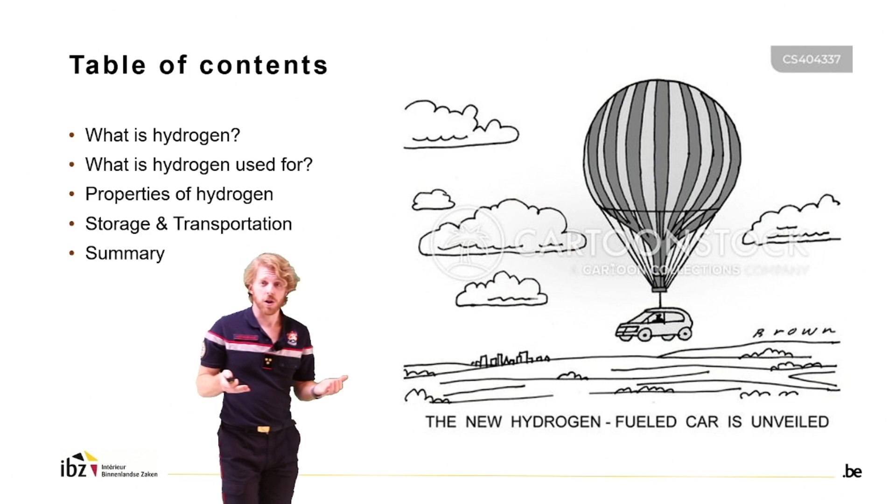In this part we are going to talk about hydrogen, its properties and its risks. First, what is hydrogen? Then what is hydrogen used for, followed by its properties. Then how do we store and transport hydrogen? We'll conclude with a short summary.

So first of all, what is hydrogen? We have this periodic table here, and hydrogen you can find at the upper top left. Hydrogen is an atom, an element, and it is actually the smallest and lightest element currently known. We often mistake hydrogen with hydrogen gas. In common tongue we use the term hydrogen just as we use oxygen, but it's actually a combination of two hydrogen atoms which form the molecule hydrogen gas.

Hydrogen is a flammable gas, and if you combine it with oxygen, you get water and energy, in the form of heat or energy that can be used as electricity. Vice versa, if you want to create hydrogen, we need to apply energy to water to create hydrogen gas and oxygen gas. How does this look like?

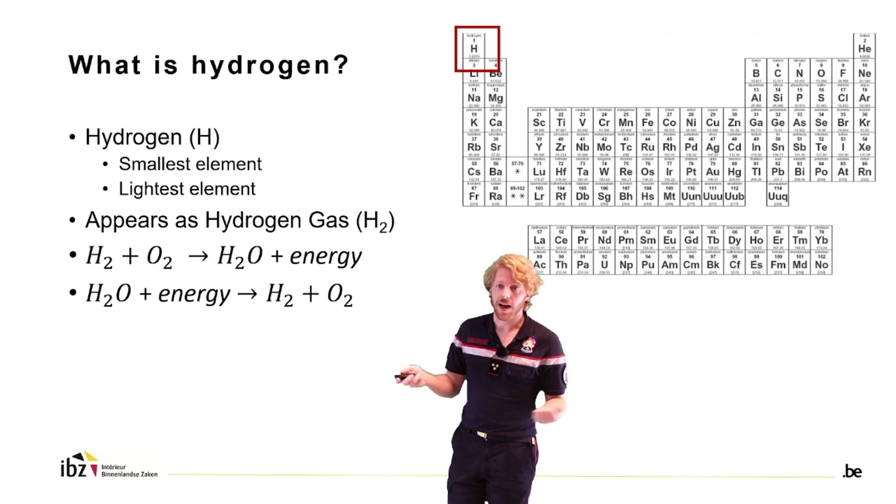Well, it's more like this: you have the hydrogen atoms bonded as a molecule, they combine with oxygen, and then you get water and the energy that is dissipated.

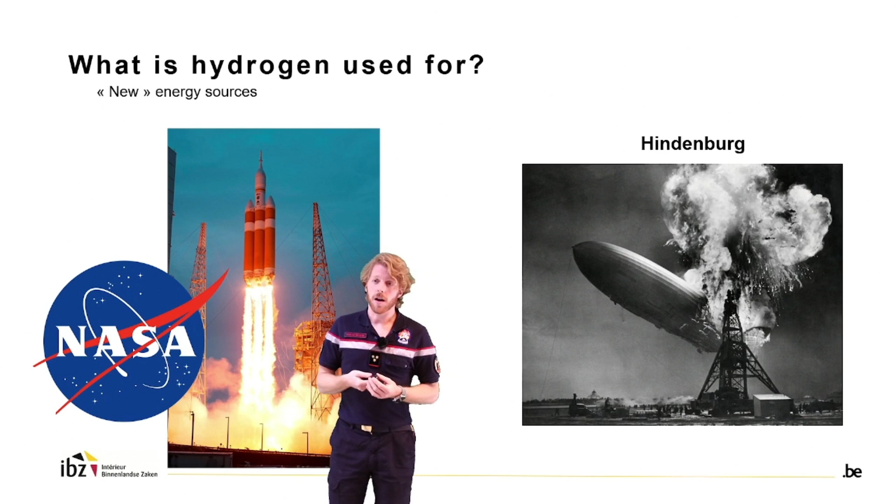What is hydrogen exactly used for? We often talk about new energy sources, but actually hydrogen has been around for a couple of decades already. It has been used as rocket fuel, and one of the most known incidents about hydrogen fires is the Hindenburg, a Zeppelin fueled by hydrogen that exploded, or rather inflamed, due to electricity in the air.

Why do we want to use this hydrogen in current technology? Well, hydrogen has a high specific energy, meaning it contains a lot of energy per unit of mass. If we compare it with diesel, diesel has about 44 megajoules per kilogram, while hydrogen has about 3 times as much energy within 1 kilogram.

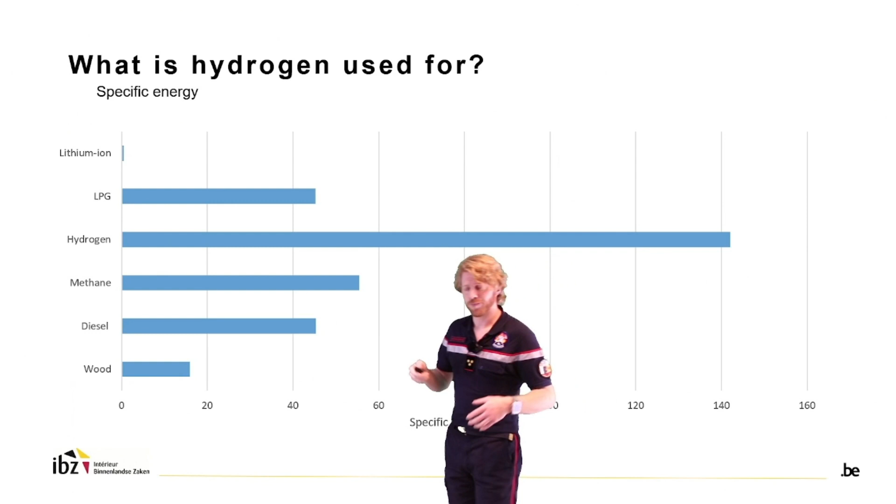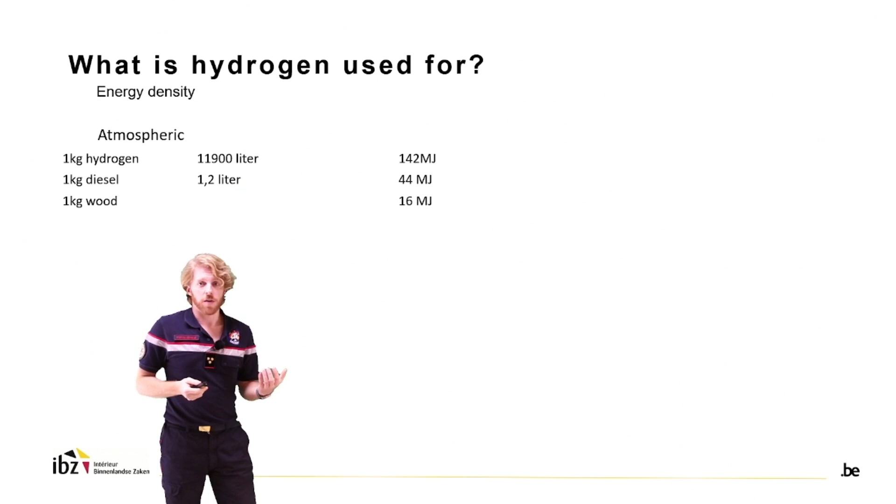This is per kilogram, but we can also look at this by volume. 1 kilogram of hydrogen is about 12,000 liters in volume under atmospheric pressure, compared with 1 kilogram of diesel at about 1.2 liters. So 1 kilogram of hydrogen gives 140 megajoules, whereas 1 kilogram of diesel only gives 44 megajoules. You could say that for 1 kilogram of hydrogen you would need 3 to 3.2 kilograms of diesel.

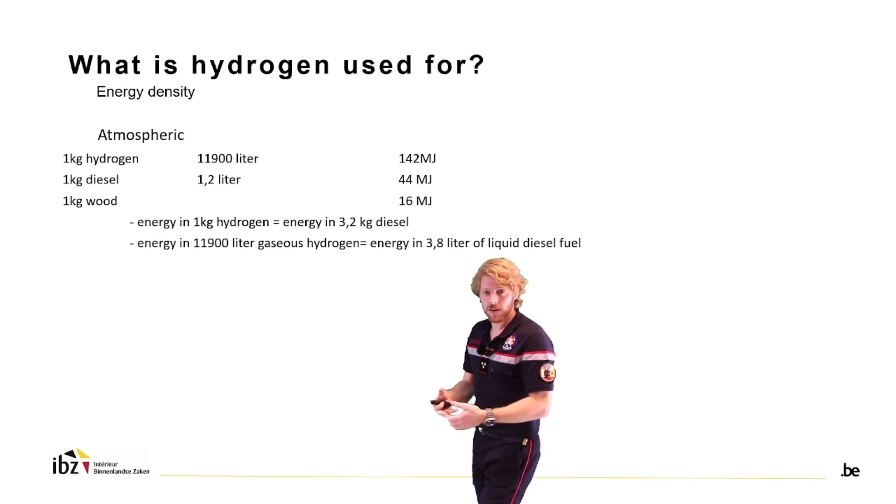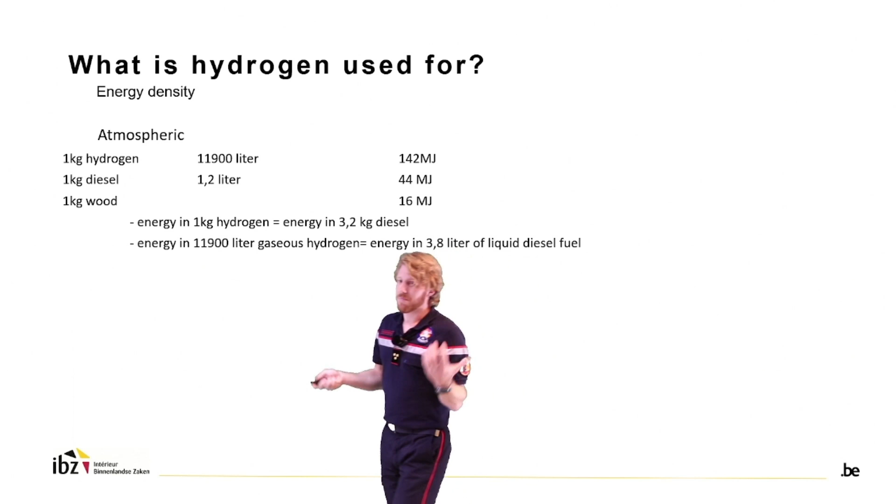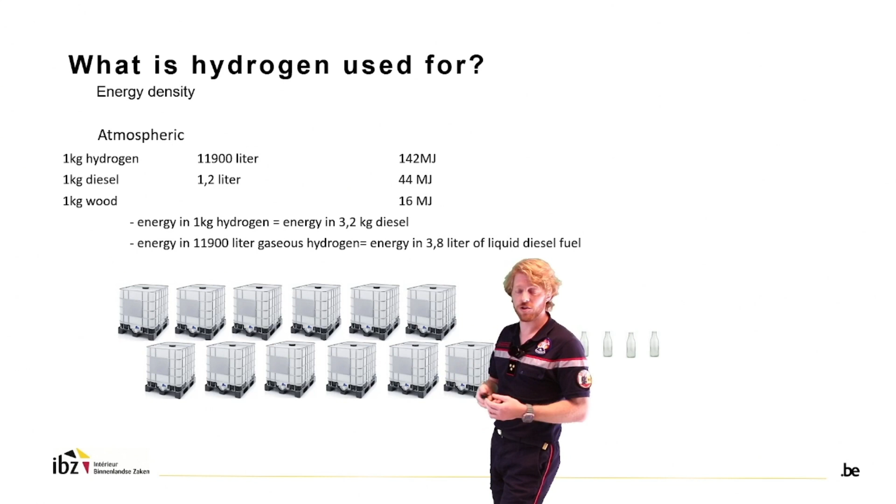However, if you do the calculation in liters, for every 12,000 liters of hydrogen you would need about the equivalent of 4 liters of diesel. This may seem abstract, but compare it this way: the diesel could be contained in small milk bottles, you'd only need 4, whereas for hydrogen you would need about 12 cubic meters to reach the same amount of energy under atmospheric pressure. So hydrogen has a very low energy density per unit of volume, but a high specific energy per kilogram.

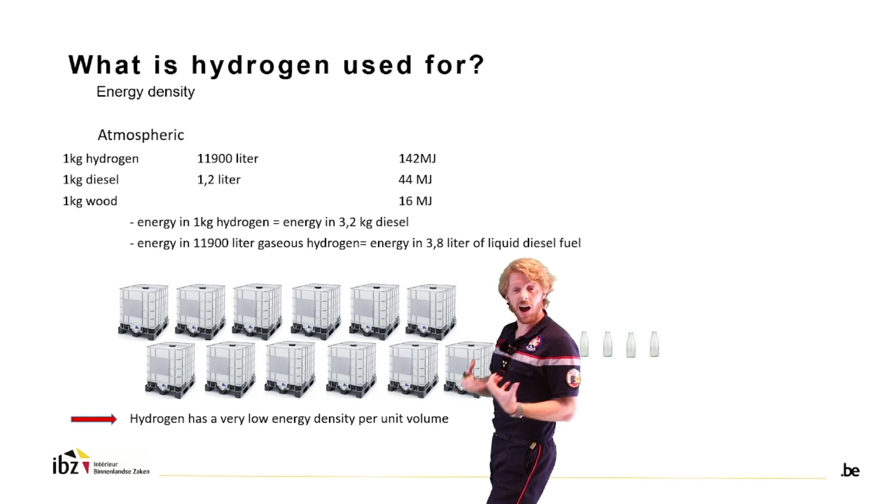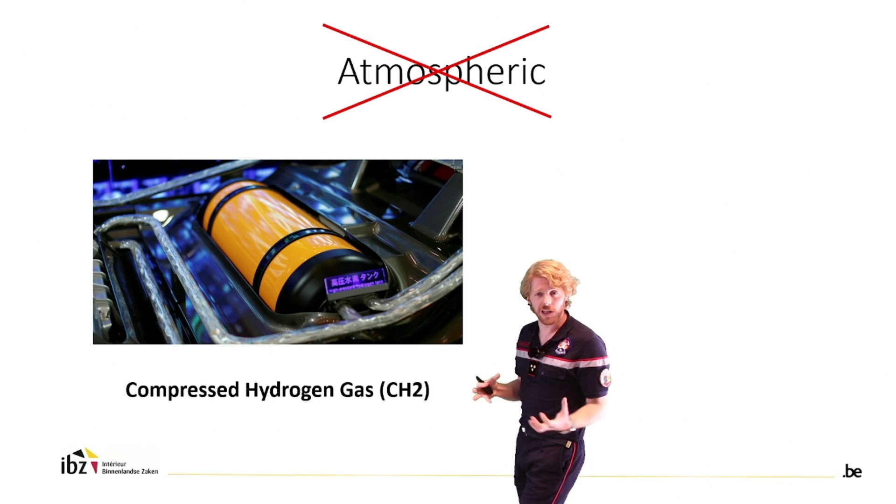This is actually the reason why it is not used in atmospheric conditions. So how does technology solve that problem? There are a couple of ways. The most known ones are to compress it into a cylinder, giving compressed hydrogen gas, or to cool it. If you cool gases they shrink and you can contain them in smaller volumes, so you can also have liquid hydrogen.

If you liquefy it, if you take away the temperature or take away the heat, then you can liquefy that hydrogen and make it in a smaller volume.

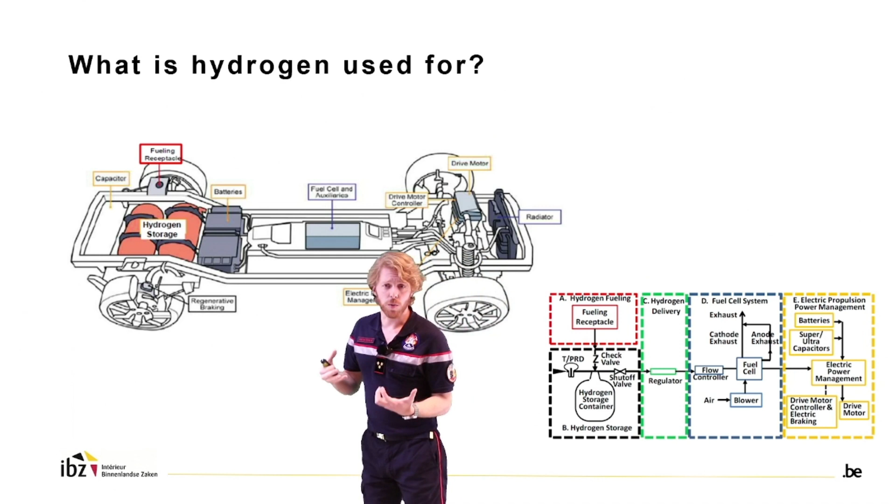What is it used for? Well, most people think about hydrogen-propelled cars, which is actually more or less a sort of electrical car. There's a fuel cell in this car that changes the hydrogen via a chemical process into electricity, and then that electricity goes to a smaller battery, which is used to propel the car.

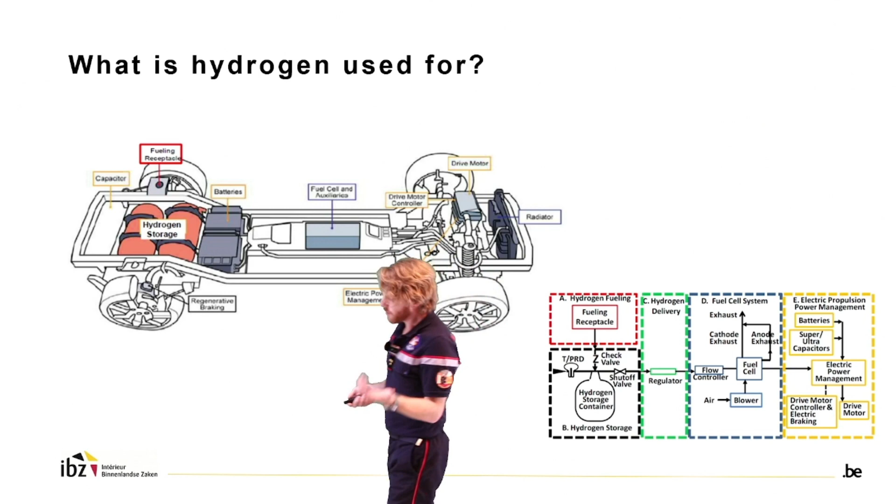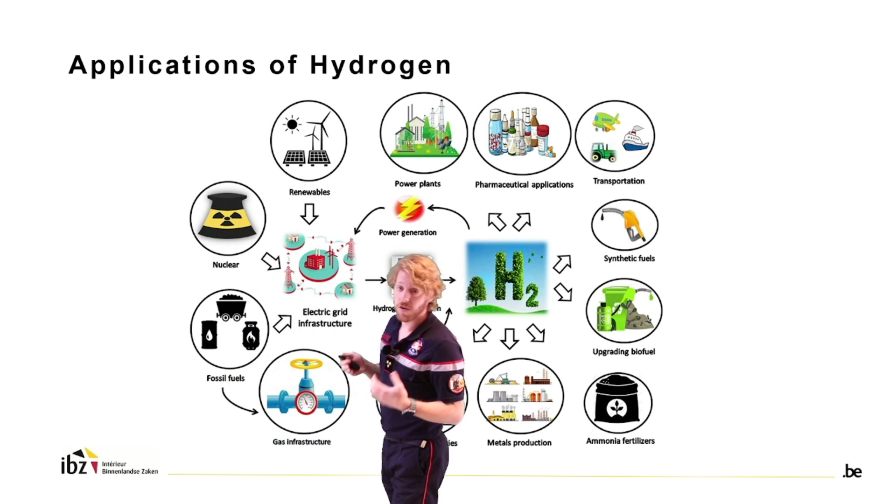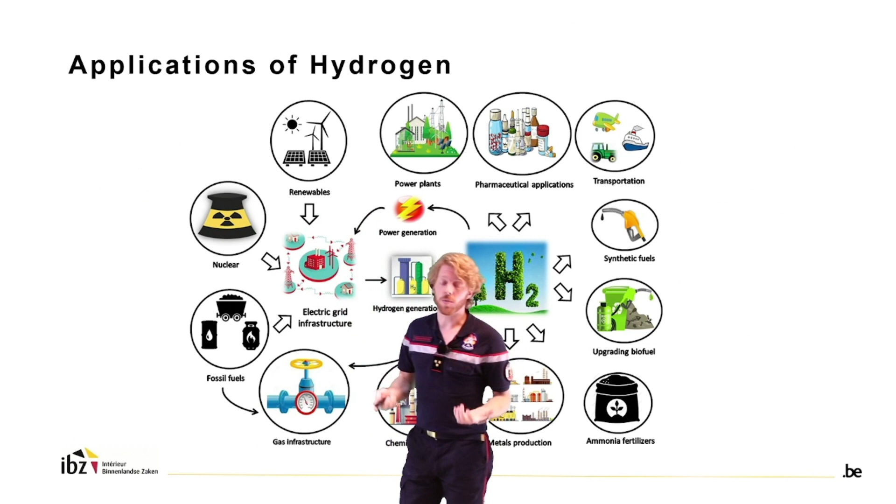But there's actually a lot more applications for hydrogen. You can use it for energy, you can use it to create fertilizers, you can use it to upgrade biofuel, it can be used as a transportation way, but there's also several ways of creating hydrogen. You can create it by nuclear energy, you can create it by fossil fuels, or you could create it by renewable energy.

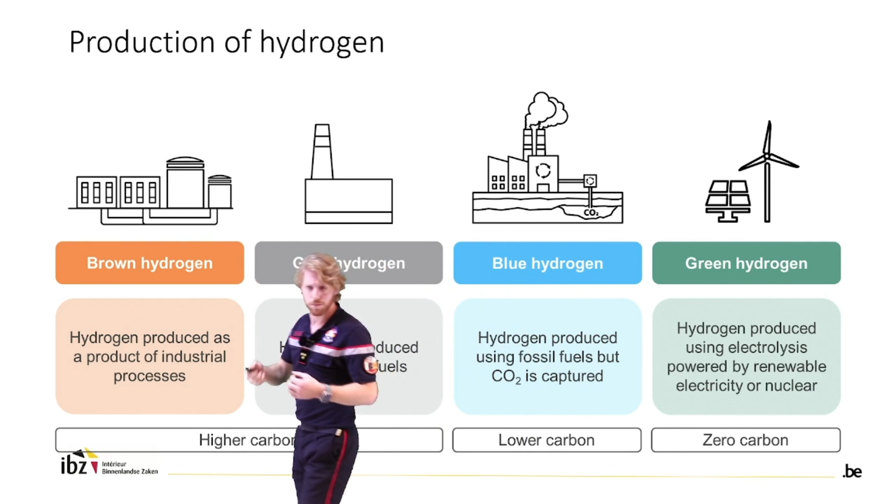This is actually an important thing about the green aspect, because when we think about hydrogen, it's not always this green form of energy. It's not always zero carbon. If it's produced by a fossil fuel, then you cannot really call it a green fuel. Sometimes it's also a residue of another process, or you could create hydrogen and then capture the CO2 to use it for something different. So this is how they categorize different kinds of hydrogen to see if it's more carbon neutral or not.

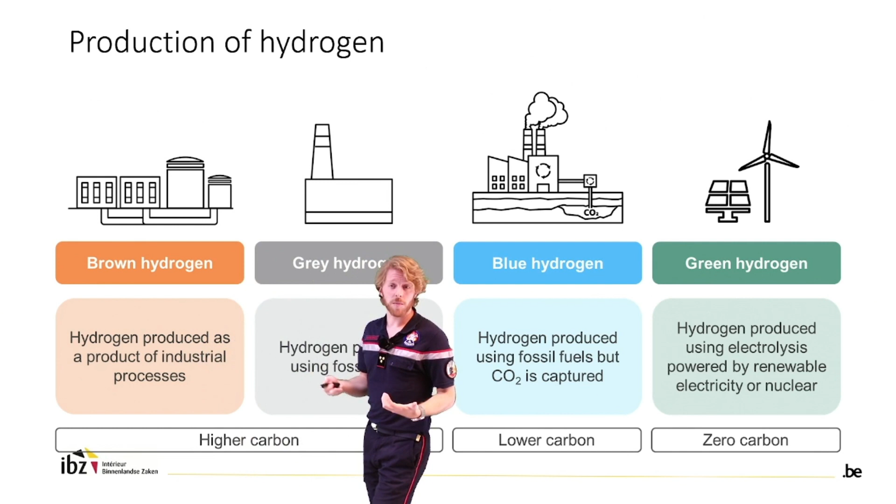Now, for us at the firefighters, what are we going to do with that? Well, first of all, the perception of hydrogen. Hydrogen is a flammable gas. It is colorless, odorless, so we cannot smell it. It's not really poisonous, but it can push away all of the oxygen, so we can suffocate in this environment.

So it's not directly that it would be toxic to our bodies, but if it pushes away all of the oxygen, then we can have some problems to breathe. When we look at some other properties, for example, the buoyancy.

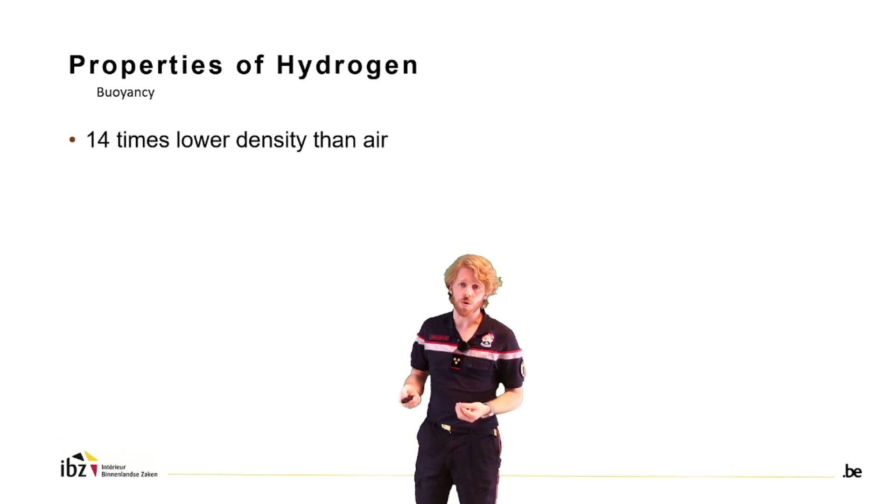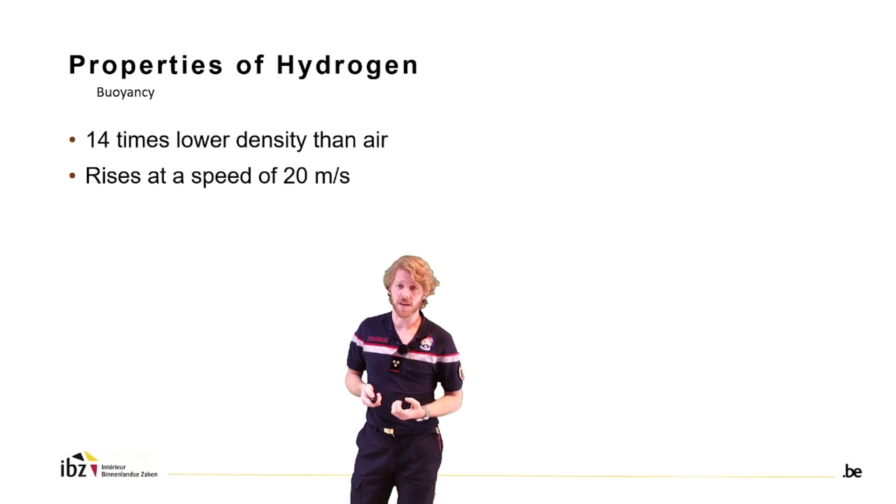Hydrogen, as we said already, is the smallest element that is known. Its density is about 14 times lower than air, which results in it rising at a speed of about 20 meters per second. It's the best buoyancy on Earth, and that means that a lot of the hydrogen is just going to dissipate in the air.

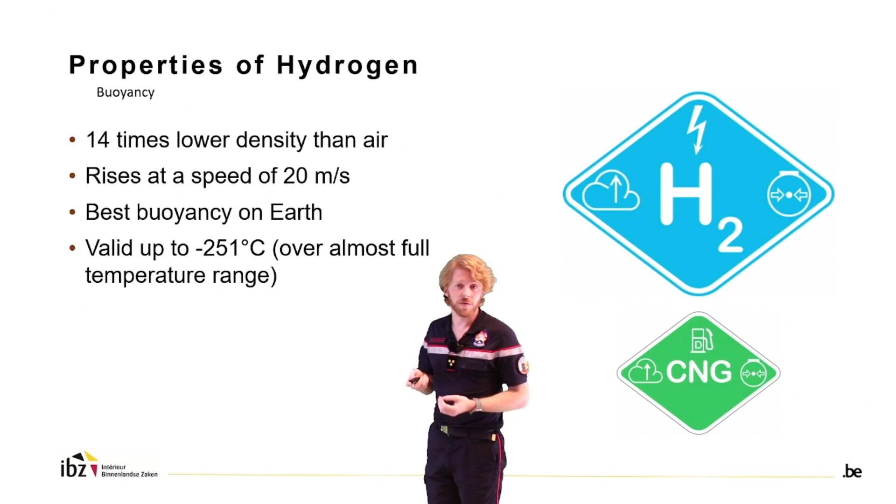So we said already that the density is very low, and that is actually valid up until a temperature of minus 251 centigrade. So if we are outside, most of the undesirable effects of hydrogen are going to dissolve very quickly.

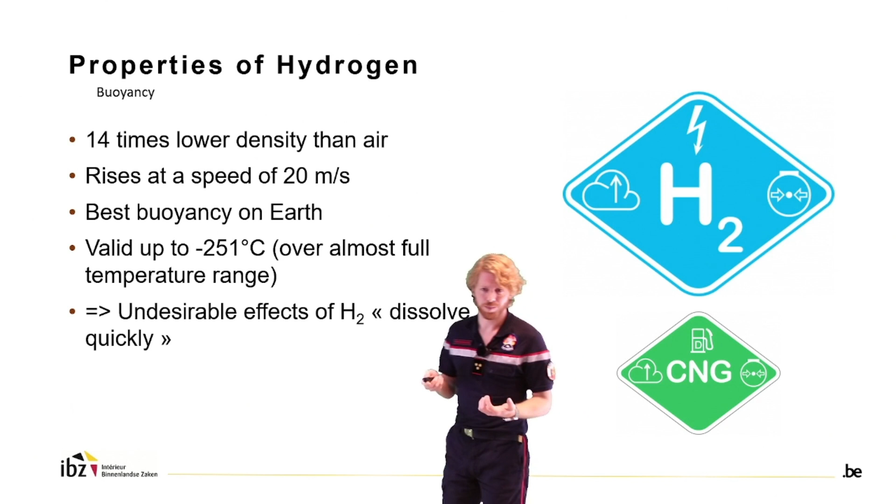We can also look at the flame properties. And for the flame properties, we need to look at this formula that we used in the beginning. So hydrogen and oxygen is a combustion equation, and that creates water and energy.

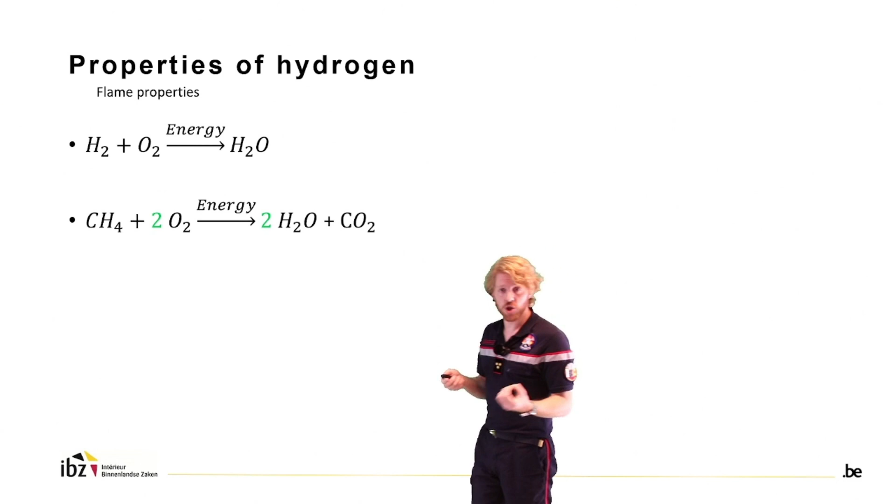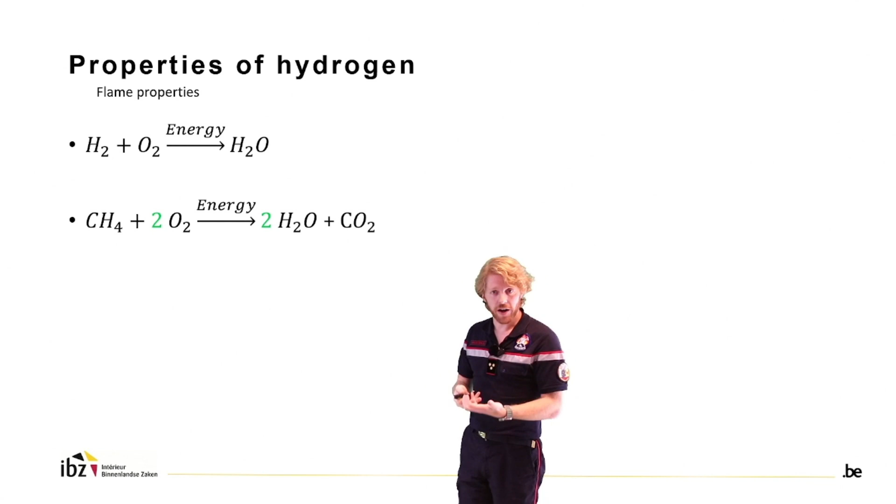To understand that, we need to actually compare that to, for example, the most easy hydrocarbon combustion reaction, which is methane with oxygen, which creates H2O, so water, and carbon dioxide. That's actually if you have a perfect combustion, if all of the methane perfectly gets mixed with air and everything is burned.

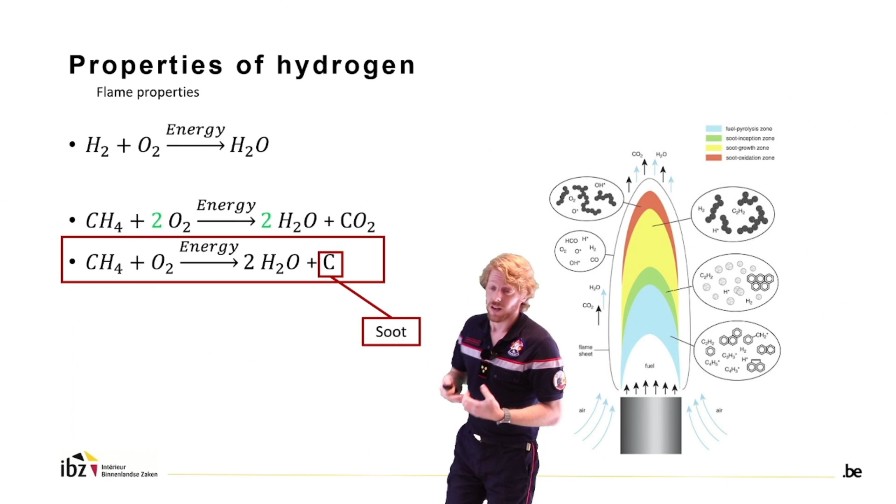If we look at something that is more realistic though, we also have this little element here, carbon or soot. And it's actually due to the soot that flames are visible. Soot can radiate, can become red, become orange, become yellow, and that actually gives the color of a flame. Well, when we look at this hydrogen equation, then we can see that there's no carbon present. That actually means that flames are almost invisible.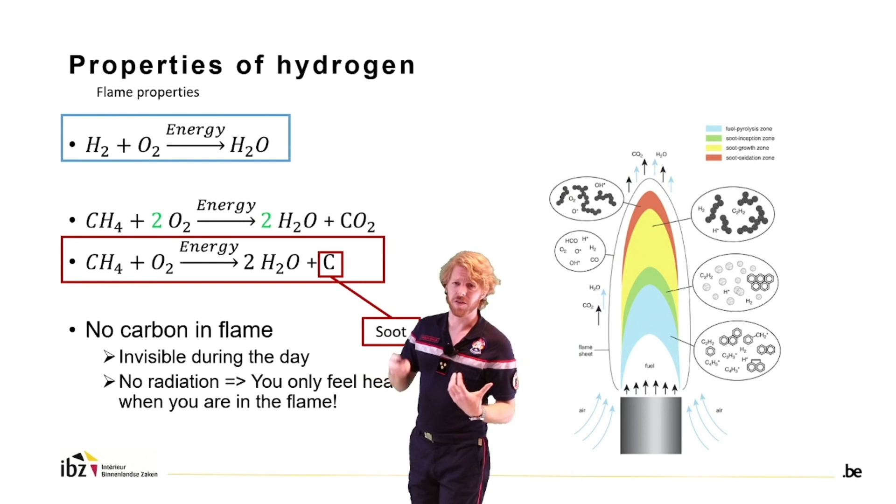But something more important, this soot or this carbon, also due to the fact that it radiates, that is the radiative heat that you can feel when you approach a flame, which is not present in a hydrogen reaction at all. So this is one of the dangerous parts that we have in our hydrogen fires. I'll show a quick video about how you can see this difference.

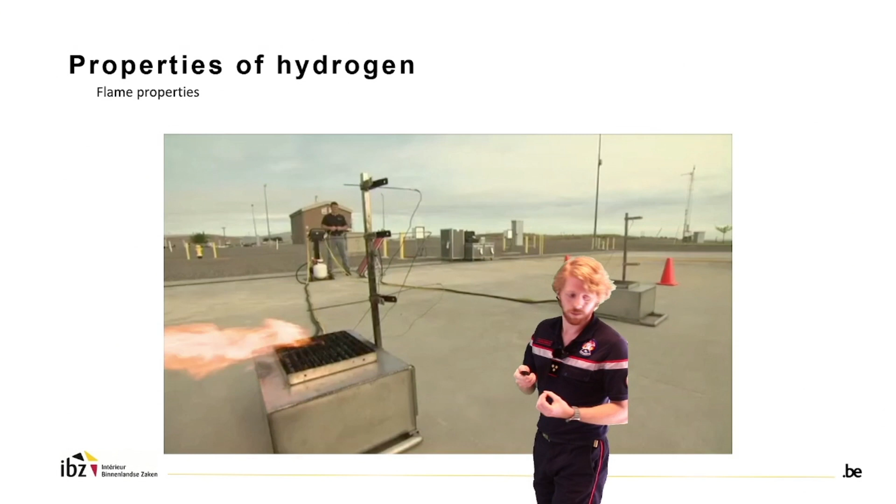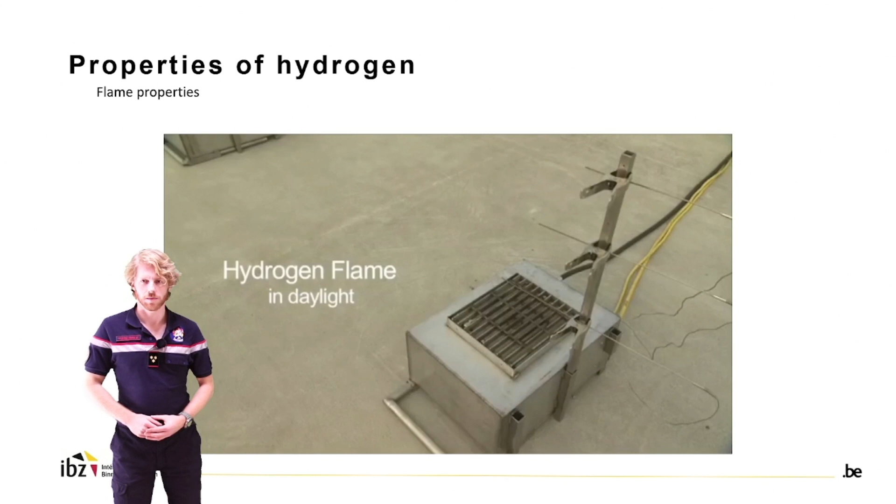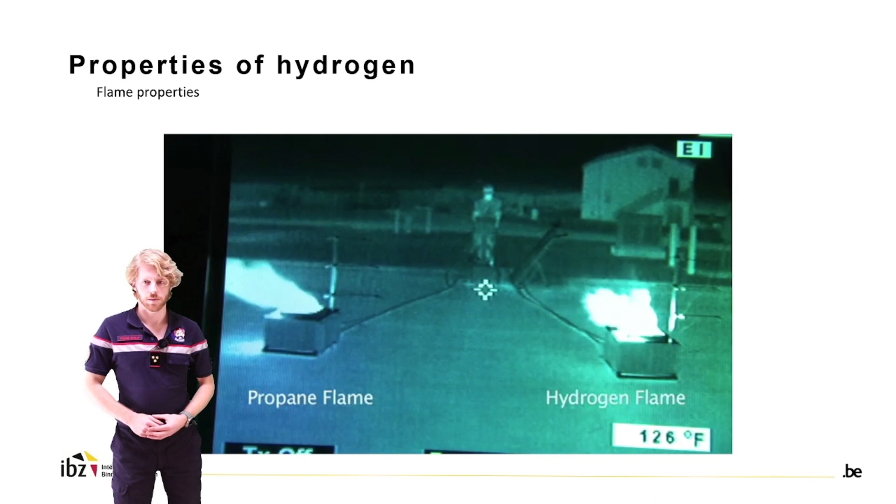Here we have the propane and hydrogen flames burning on a bright sunny day. The orange propane flame is clearly visible, while the hydrogen flame is nearly invisible. But when we look at the flames through a thermal imaging camera, we can see both flames clearly. A pure hydrogen flame has low radiant heat, much less than the heat radiated from burning conventional fuels. Now let's do the same demonstration in the dark, at night.

We are in the same location that we used in the daytime. You can see that the same landmarks are visible. In the dark, both flames are clearly visible without a thermal imaging camera.

So this video gives a small indication of how the visibility of a hydrogen flame really is. It's important to notice that you cannot see the hydrogen flame, but if something around the hydrogen flame is burning, then that is obviously another material that is burning, and that you might see.

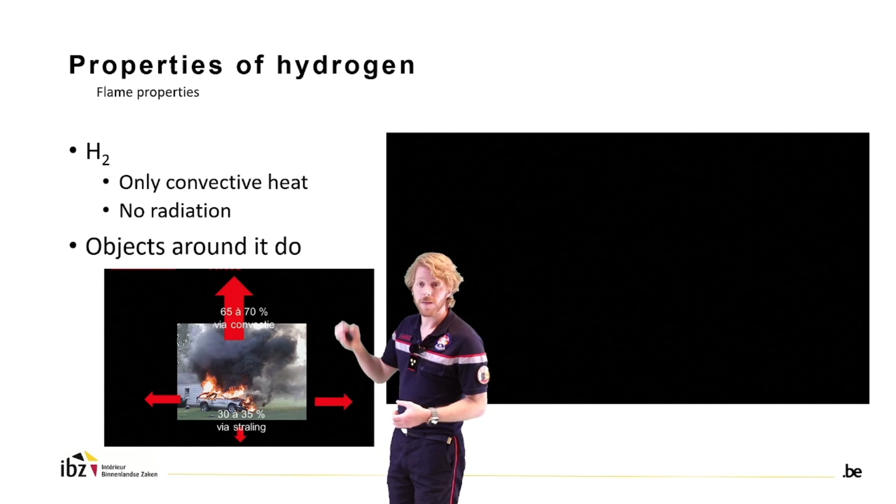We can also check this difference in radiation. As we said before, in a normal hydrocarbon fire, about 65 to 70% of the energy is lost by convection, and the other 30 to 35% is lost by radiation. It's this radiation that we actually feel. Hydrogen fires only have convective heat and no radiation.

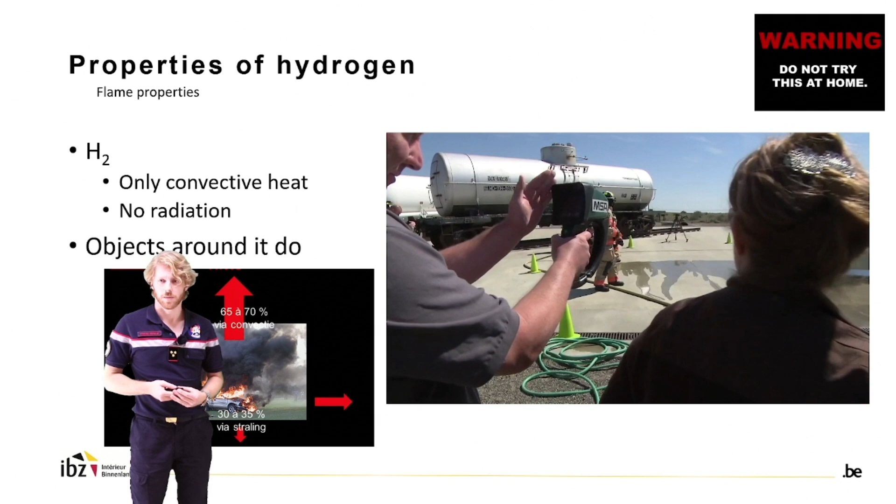Is all my fur intact? How close was that to that flame?

There you go. So small disclaimer, do not try this at home. If you go too fast, then you will have 100% of the heat going through your hands.

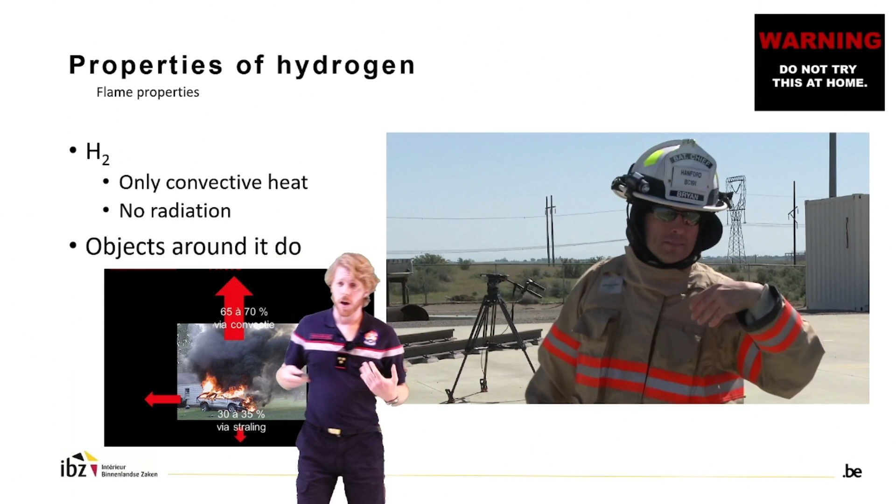Another way to test this is to approach it with a flammable material. As we said before, the flames can become visible if an object around it is burning. So here you see this broomstick. As soon as it goes into the hydrogen flame, the broomstick ignites as well.

When we look at the ignition properties, hydrogen is also a particularly interesting element to talk about, because the flammability limits are actually from 4 to 75%. That is a very large envelope for flammability limits. If we compare that to methane, which is between 5 and 15%, that is actually a much larger flammable envelope.

The detonation limits are a little bit smaller, so what's the difference between flammability and detonation? As soon as you have a detonation, you also have a pressure wave that follows it. The auto-ignition temperature, the temperature where hydrogen ignites by itself, is 510 degrees centigrade. But the flash point, the temperature at which a gas ignites if you apply an external source, is already at minus 253 degrees centigrade.

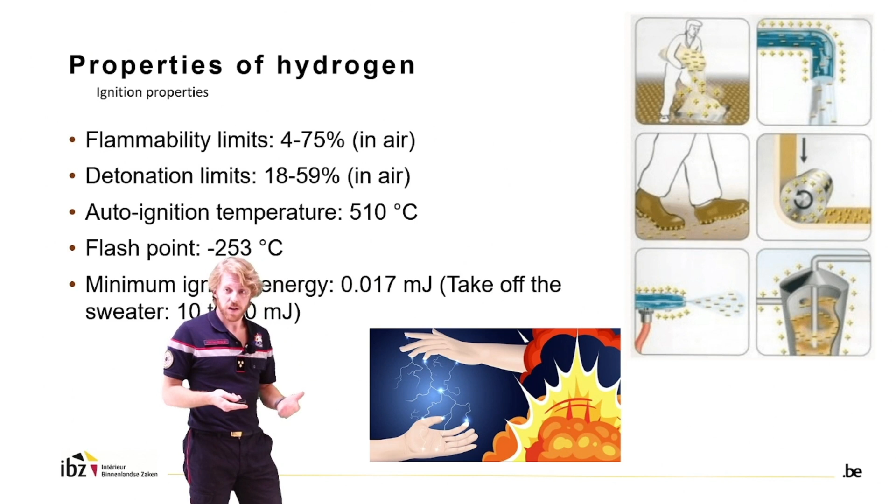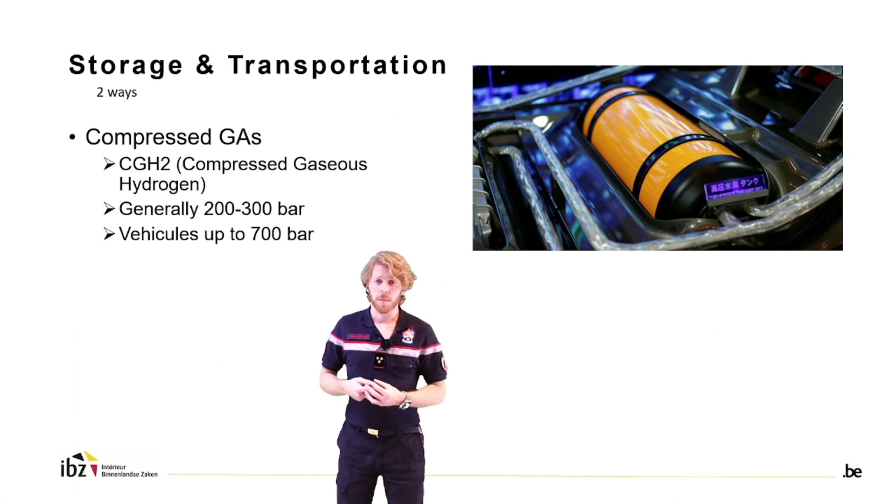Storage and transportation - we already talked about this. There are generally two ways of transportation that are commonly used right now. The first is compressed gas, where you compress the hydrogen so you have a lot more of this mass into one certain volume. Generally, the pressures are between 200 and 300 bars, but vehicles can even go up to 700 bars.

If we compare that, the second way is to really cool it down so the hydrogen liquefies. And that happens at minus 253 degrees centigrade.

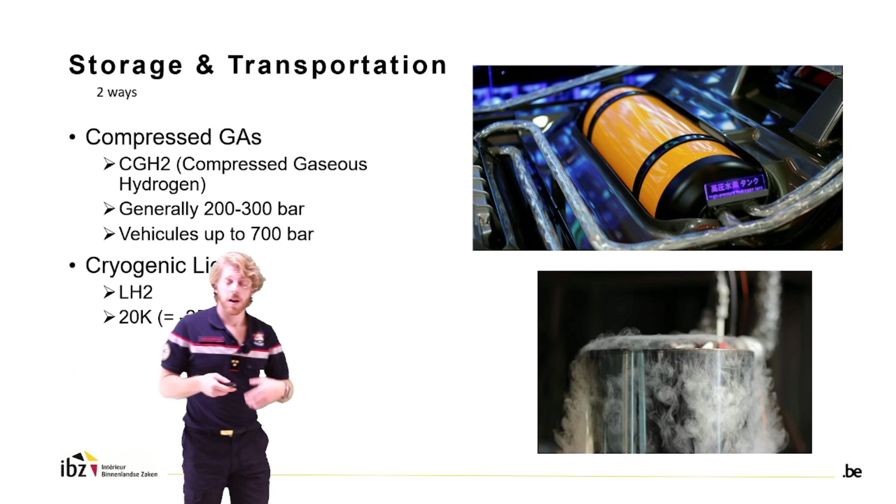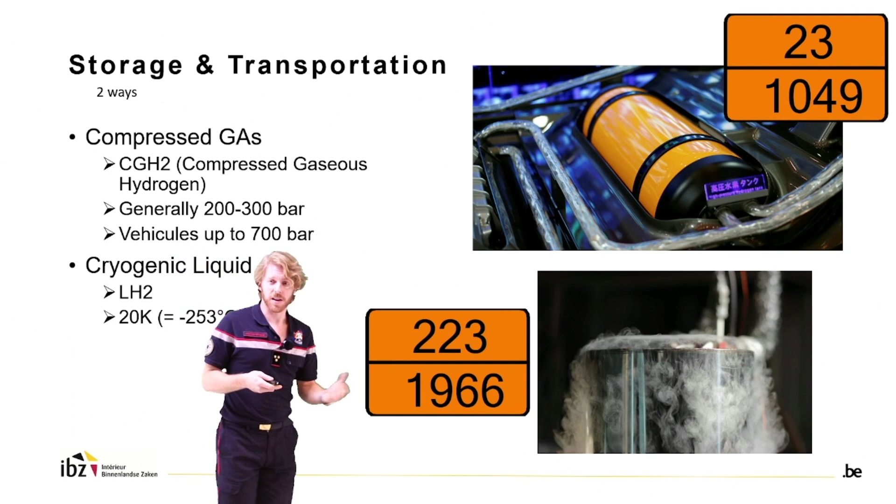Operationally, you can actually recognize those as well. In Europe, we have the ADR conventions. So when we look at the compressed gas, it's marked 23, which indicates a flammable gas. If we look at 223, then we have a very cold gas that is flammable and can ignite. So let's first look at the compressed hydrogen gas.

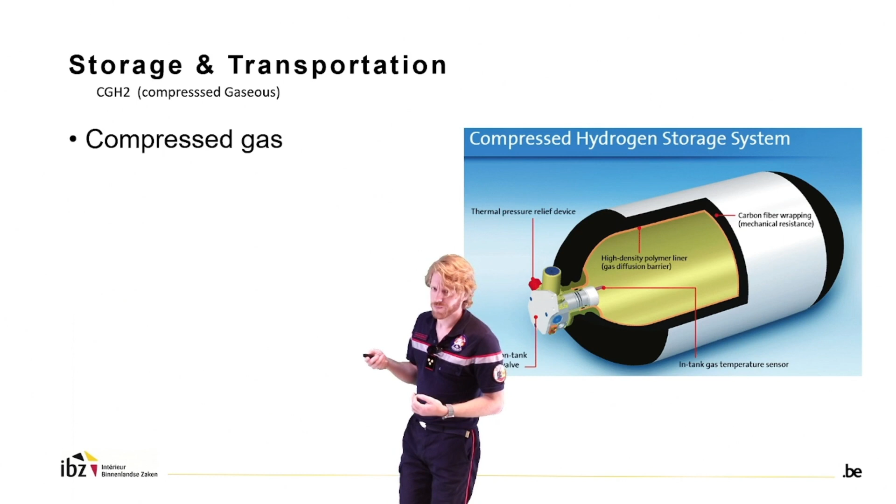If one of these pressure vessels is heated, then the pressure can arise again. Heated gases increase in pressure, but the problem is that these vessels have a certain amount of pressure they can handle before they rupture. So increase the heat too much and you may actually have a physical explosion.

One of the solutions designed by the technological society is a TPRD, or thermal pressure relief device. Another way to deal with this is to use a composite vessel that acts with resins. More about this later - this is a new technology being studied right now.

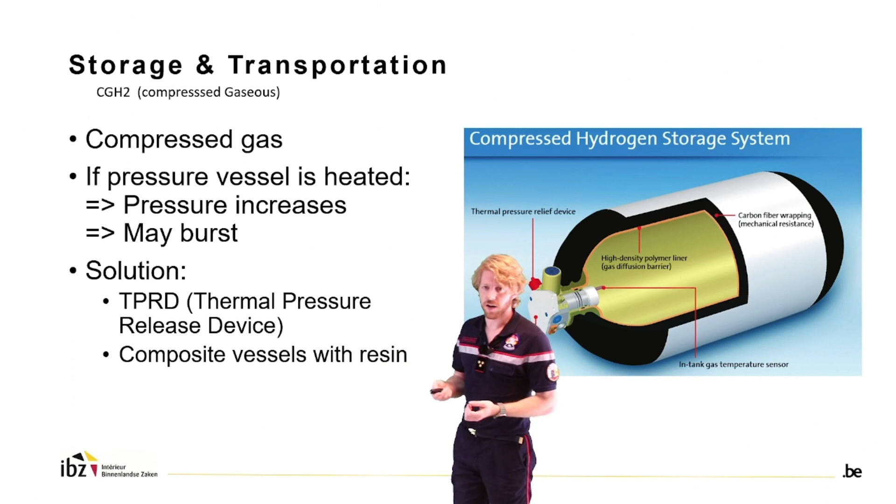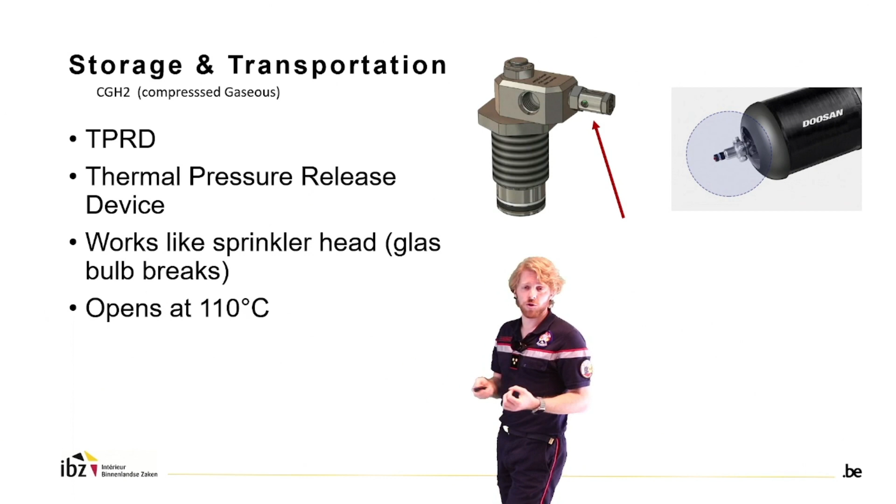First off, a TPRD, thermal pressure release device. The words say it already - it's a thermal device, it releases pressure. So if this device gets too hot, it will actually open up a valve. It works a bit like a sprinkler head, where a glass bulb can break, and as soon as it's broken, it continues to release this gas. It opens at a temperature of about 110 degrees centigrade, and once it is open, it keeps blowing off.

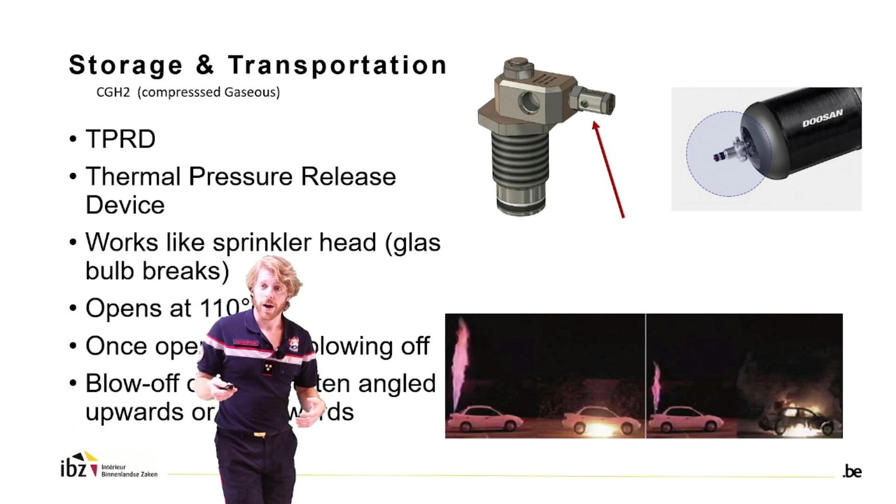It blows off often in an angled way, either upwards or downwards. There's no real convention about this, so you always have to take care and be aware of where you can find this hydrogen jet flame. Always look with your thermal imaging camera to really know where the jet flame is happening.

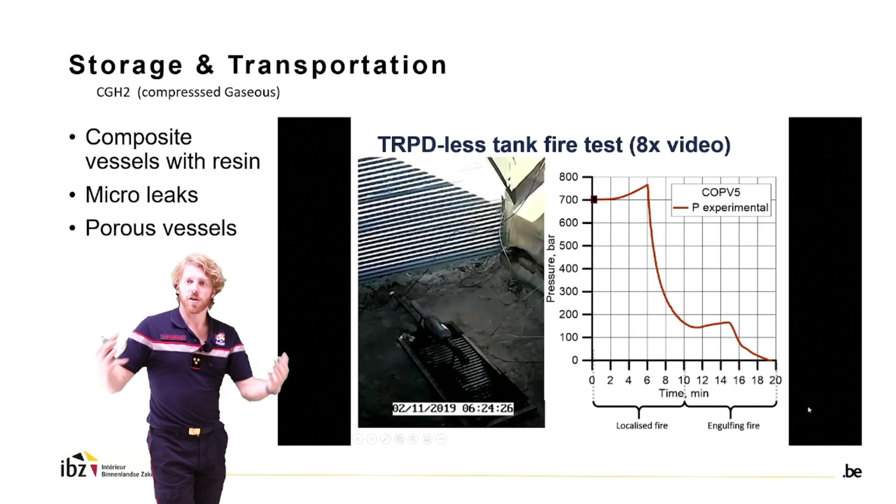A second way of preventing explosions is to use composite vessels with a sort of resin in it. If you engulf this with a flame, the pressure will increase, and this resin, this inner layer, will actually start to melt and create tiny micro leaks. So you create a sort of porous vessel, and the hydrogen can escape as soon as the micro leaks are large enough.

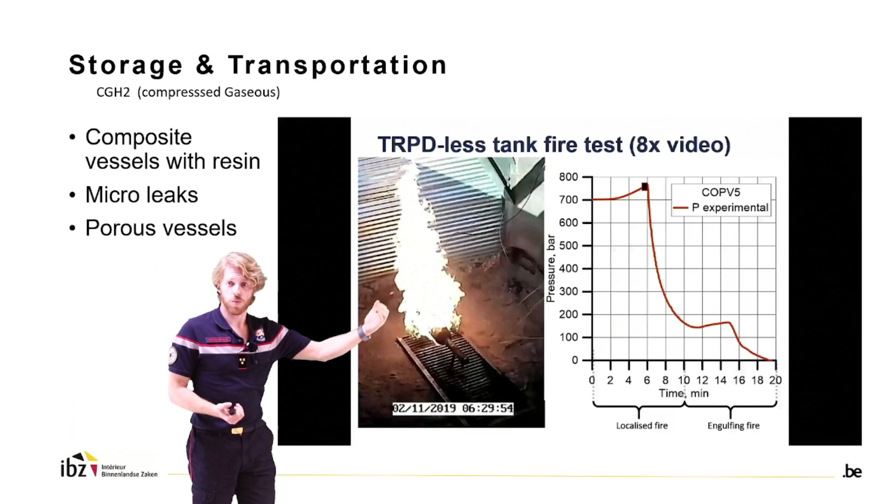Right now you see that the pressure is increasing, and as soon as enough of this resin is melted, you will see that the pressure will slowly release. At this moment the leak starts. So actually you're going to create a higher heat release rate as well, because the hydrogen is leaking from the vessel itself - it will make a larger fire, but at least we will prevent explosions. So the pressure will decrease in this experiment.

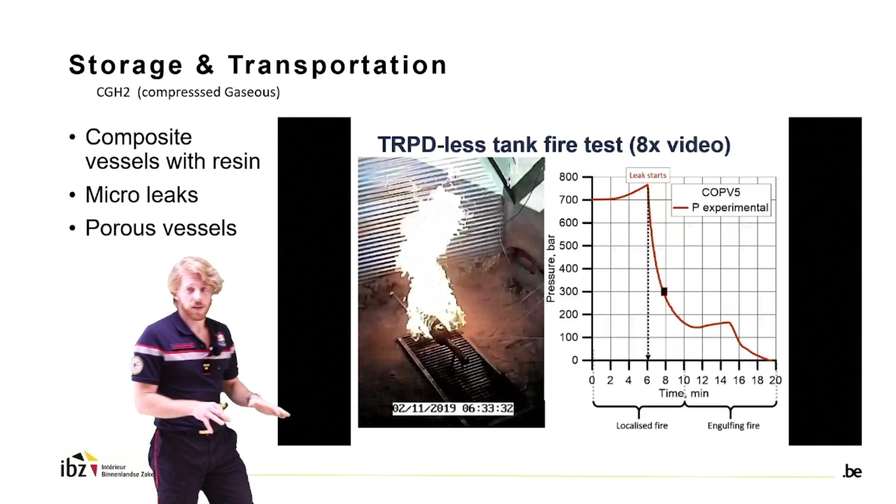Then at 10 minutes, it will be engulfed with a real fire, an additional fire. Imagine this: you have a local fire around the cylinder in your car, and at a certain point the whole car is involved in flames, or the whole filling station, or whatever is burning around it. So you have a higher heat release rate again, and you see that the pressure is rising again. But just as before, as soon as the heat is large enough, you will create bigger micro leaks that will release the gas again in a small and slow way.

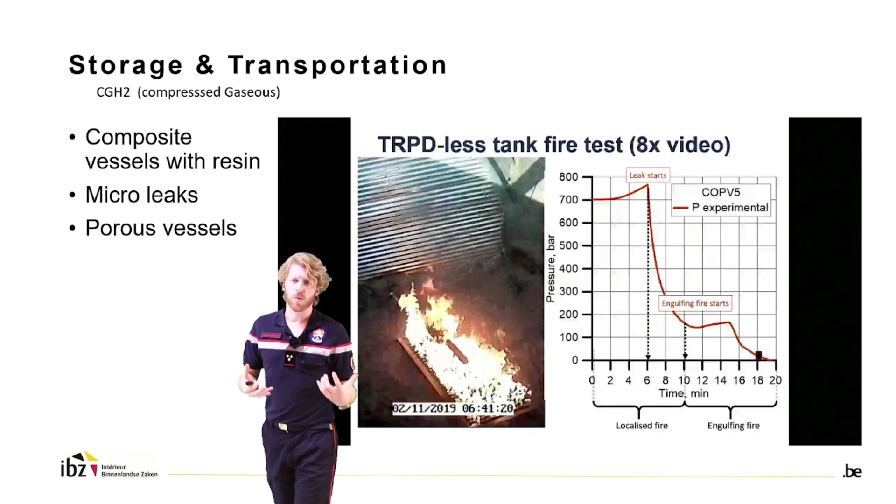It's important to note that this is a fairly new technology, and recently there have actually been explosions of these types of vessels, but more research is needed about this.

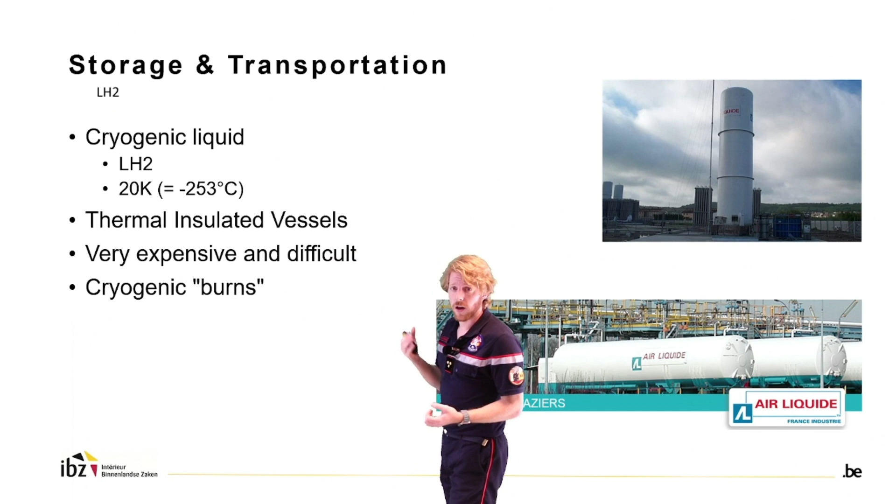We can also transport hydrogen by cooling it down as a cryogenic liquid. Typically you use thermally insulated vessels for that, but this is very expensive and difficult to build. It's also very energy demanding. But operationally, as soon as we encounter one of these vessels, we have to be aware of the additional risk of cryogenic burns. So even if the gas is not burning already, you can actually burn yourself by approaching the cold.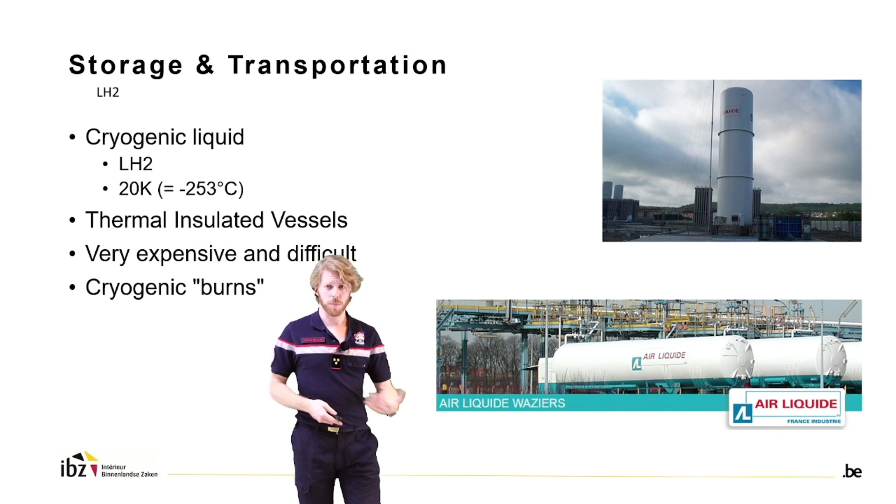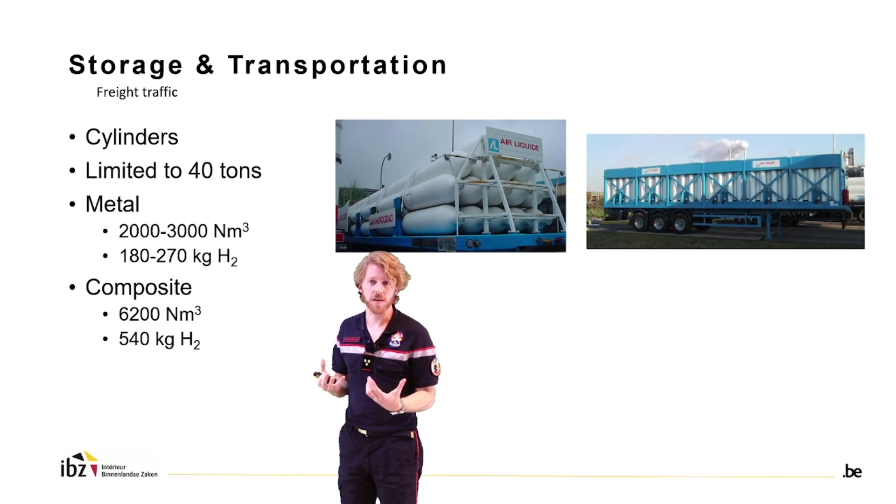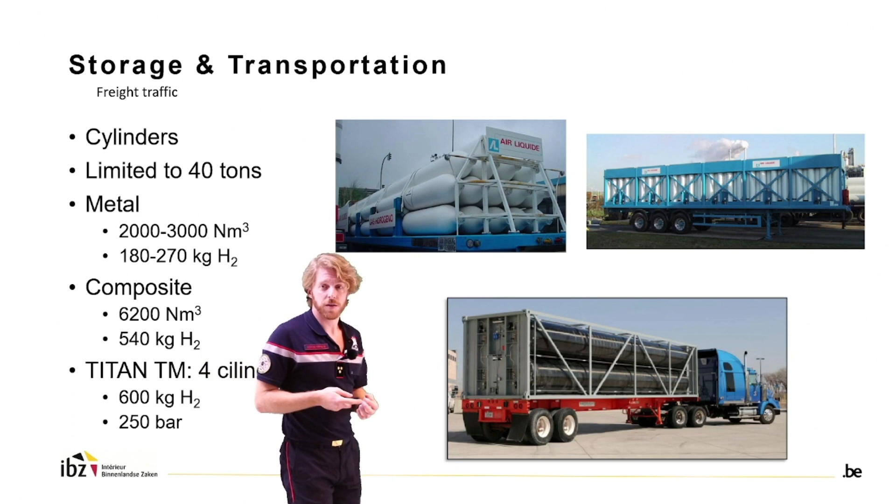For freight traffic with compressed gas, typically this is done by cylinders. In Europe they are limited to 40 tons. You have metal cylinders and composite cylinders. But one important aspect is that generally these cylinders don't have a TPRD. Typically if they're metal, we also need to be aware, because it won't have this resin inner layer, so these bottles can actually explode. In the US there are even larger cylinders that can send up to 600 kilograms of hydrogen per cylinder, so this is an even higher risk.

When we compare that with cryogenic liquids, you typically have tankers between 30,000 and 60,000 liters, which transport about 4,000 kilograms of hydrogen. But as we said before, it's an energy demanding and expensive way to transport this, so it is generally used for longer distances.

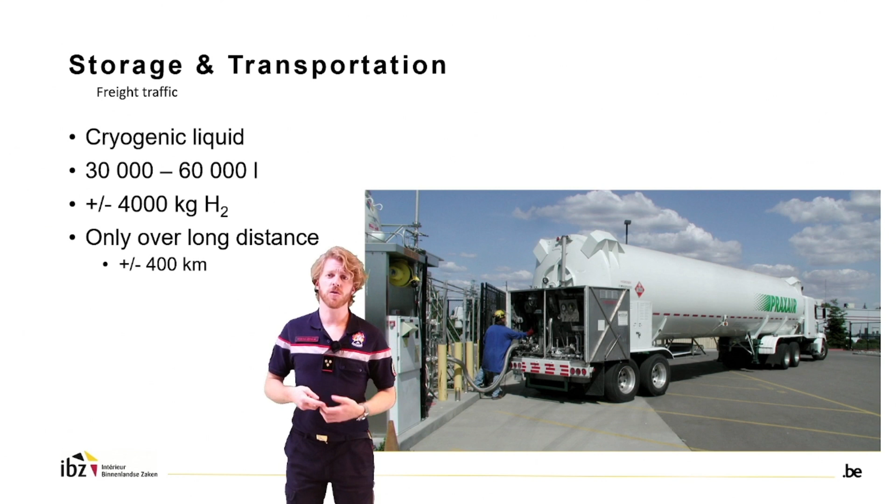Finally, another way of transportation is by the use of pipelines. Europe is actually trying to use its current pipelines to transport hydrogen as well.

In Belgium, we have these action cards or procedures, which we already used for methane gases or other flammable gases, and which we adapted for the use of hydrogen.

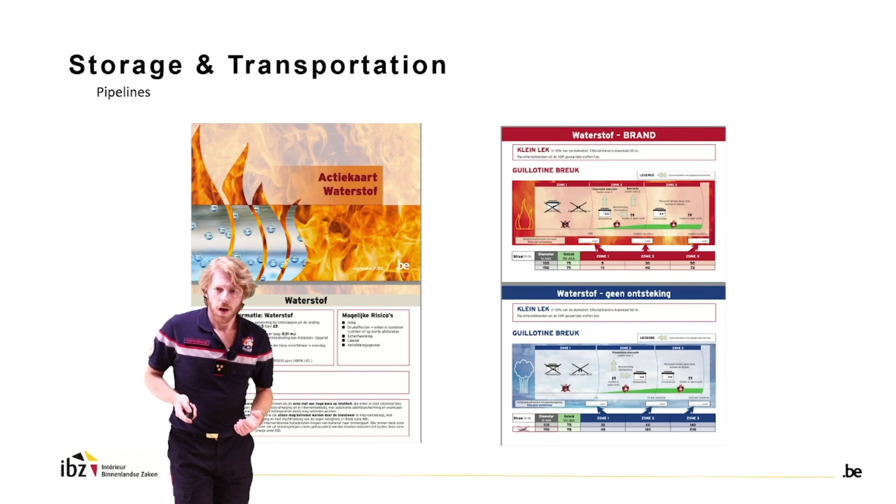I'm aware that not everyone may know these types of cards, and I apologize because it is in Dutch. But generally, we have two different options: either it's a gas that is on fire, or it's an unignited gas that is released.

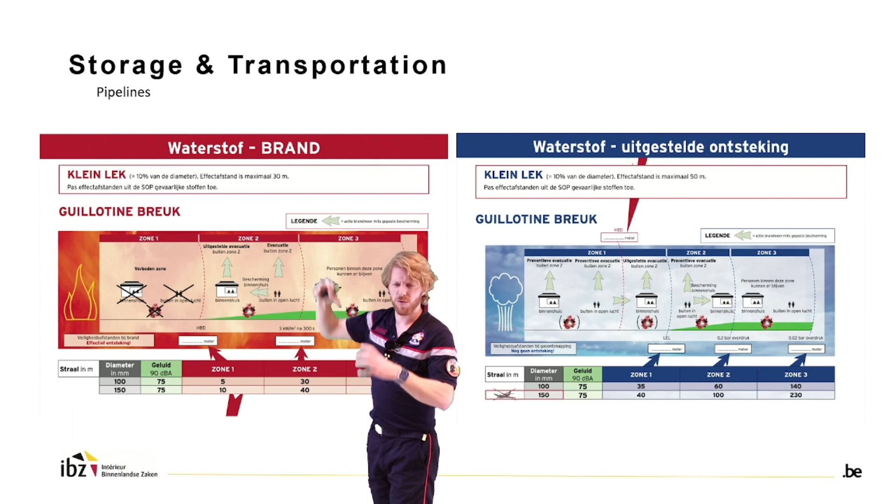We also make the distinction between a small leak, generally 10% of the diameter, and then a large guillotine rupture, where a huge amount of gas or flames are released.

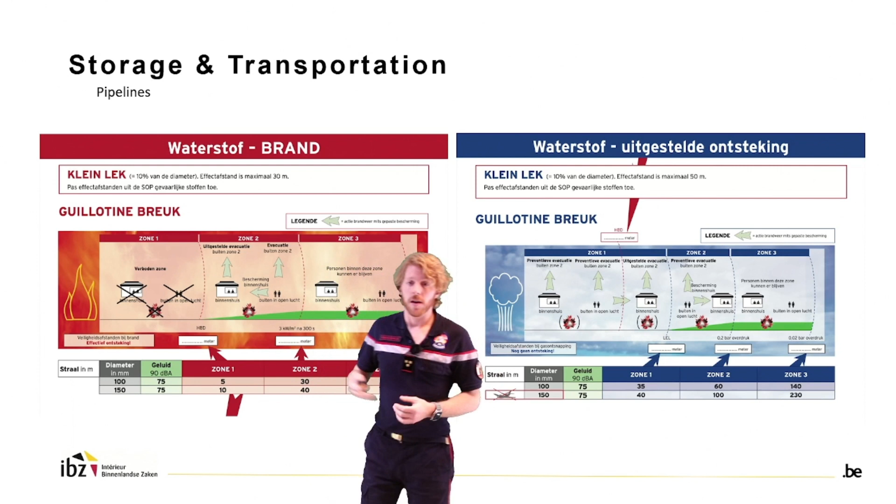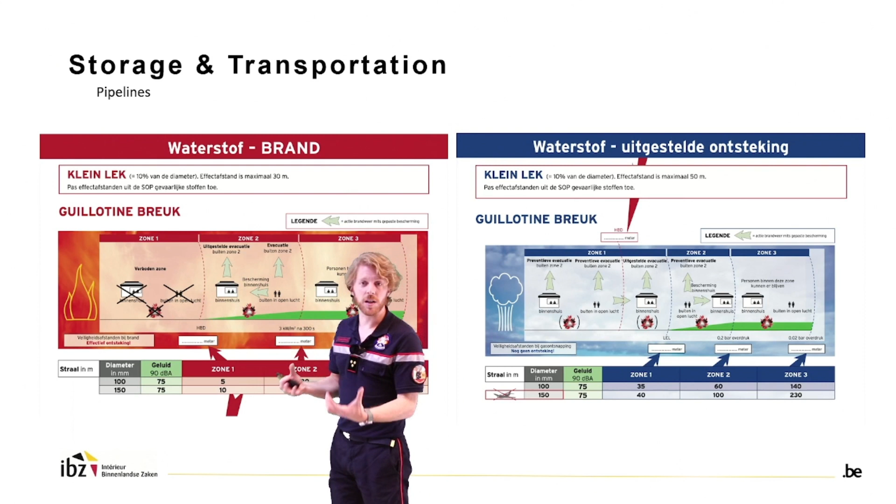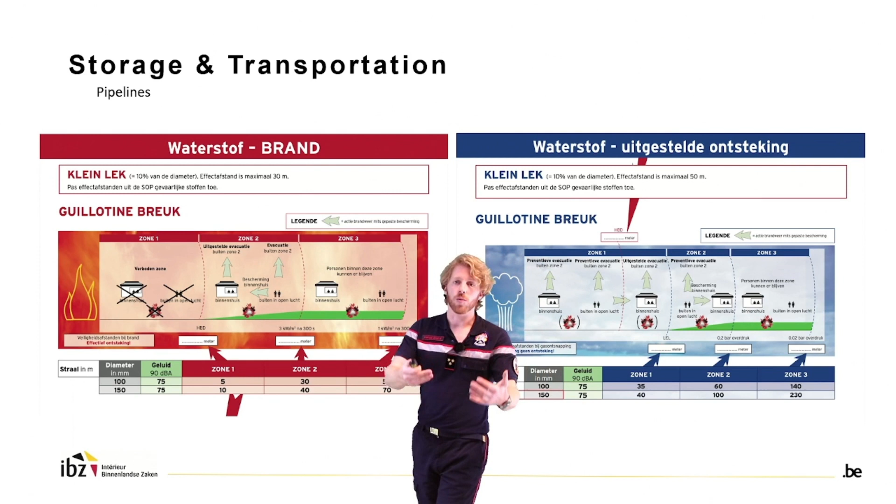Obviously, there are a lot more technologies that involve hydrogen which we have not covered in this webinar. You have train transport, forklifts, filling stations, boats, and in the future there will most likely be more technologies available.

Finally, I want to address you again to the HyResponder website. There you will find a lot of materials, such as all of the information that we are trying to condense here in a couple of minutes, hours.

But there's also this e-laboratory. If you go by the QR code, or just use the website, then you can go to an e-laboratory, which gives you the opportunity to work with all kinds of different properties about the bottles, about the orifices of the gas, the pressure that a cylinder can have, and to show you, for example, the flame length or the jet flame distance, or even explosion distances.

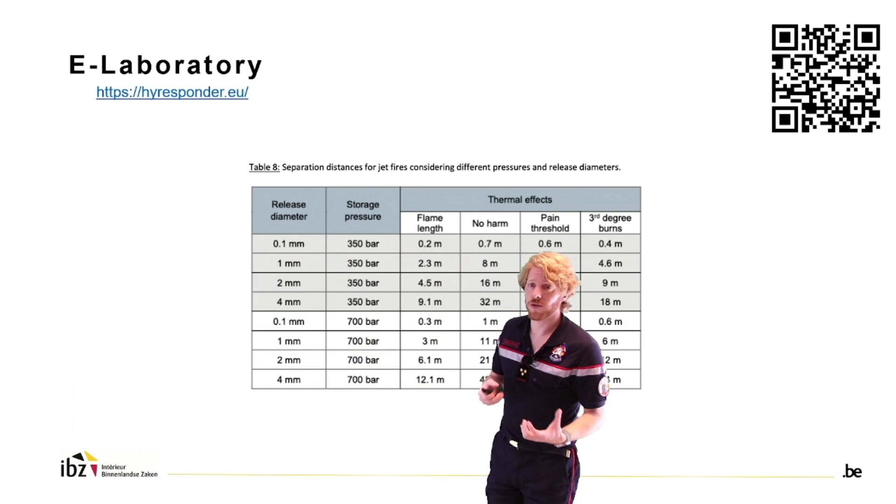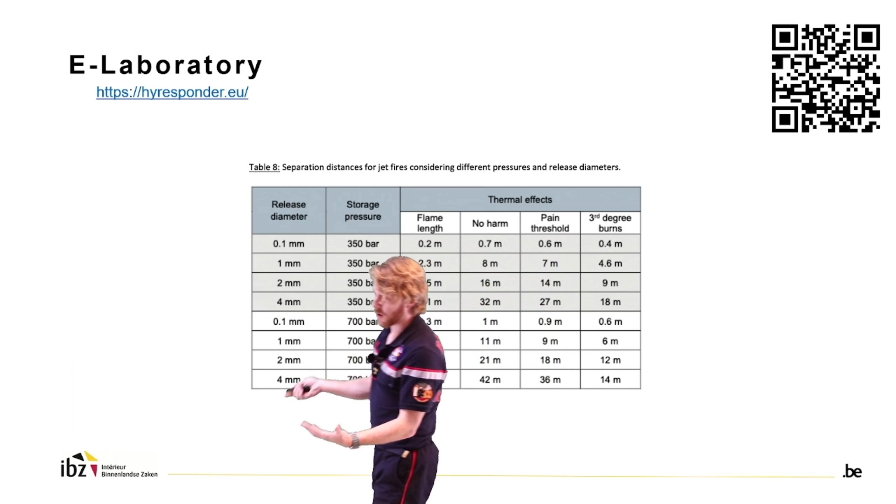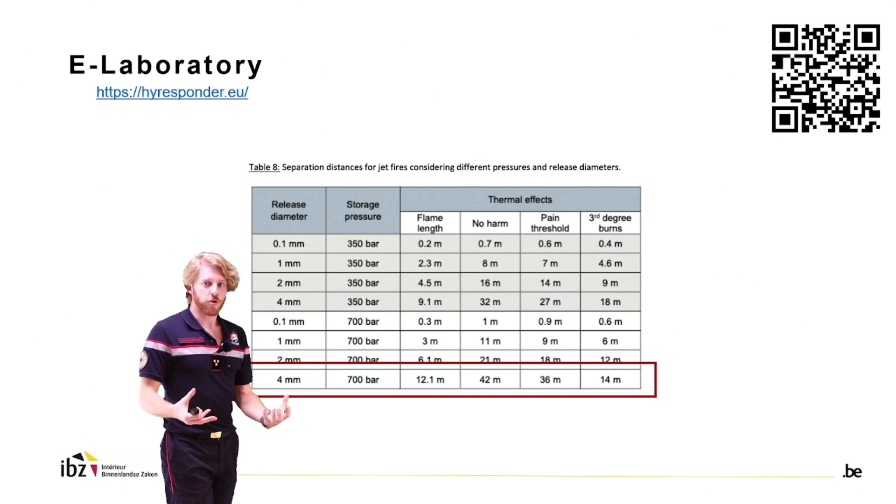As first responders, we really liked this information from the science community, but we preferred to have something simple, because on the terrain most first responders know there's no time to do these calculations, at least not in the first minutes. So we need these first actions, these first reactive distances to deal with. You can also find this in the course materials.

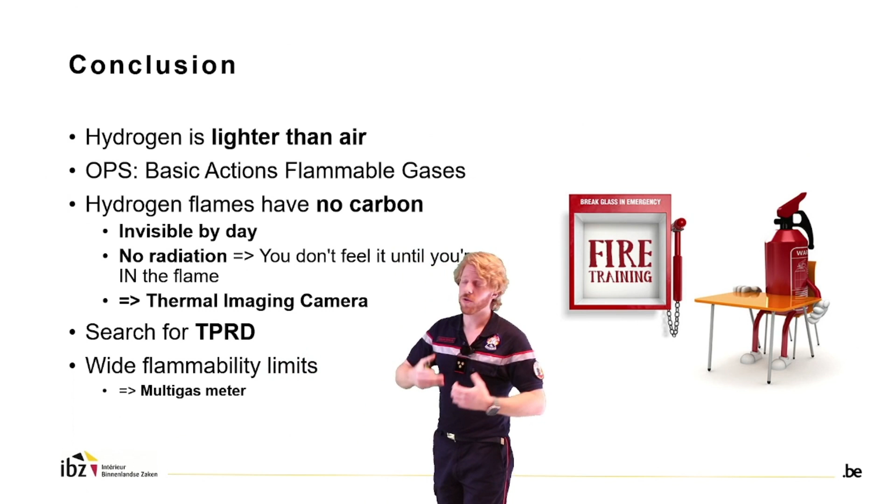To conclude this first part about hydrogen risks: first, realize that hydrogen is a lot lighter than air. If you're outside, most of the problems are going to dissipate themselves. If you're in a closed area, know that it will go to the ceiling. For the operational part, this will follow in the second part, but know that your basic actions about flammable gases stay the same.

Operationally, hydrogen flames have no carbon, so it's almost invisible by day, and even more important for safety, you don't feel it until you are actually in the flame itself. So always use a thermal imaging camera to approach these types of fires. Mostly you will not know before you turn up to an incident that you will actually have a hydrogen fire, so use your thermal imaging camera at every fire where you suspect you can have hydrogen.

And then lastly, search for the TPRD, because that is going to show you where the gases are going to release. Be aware that you can have an explosive environment, so use a multi-gas meter, which can help you detect what kind of environment you are in. More about this in the operational manual.